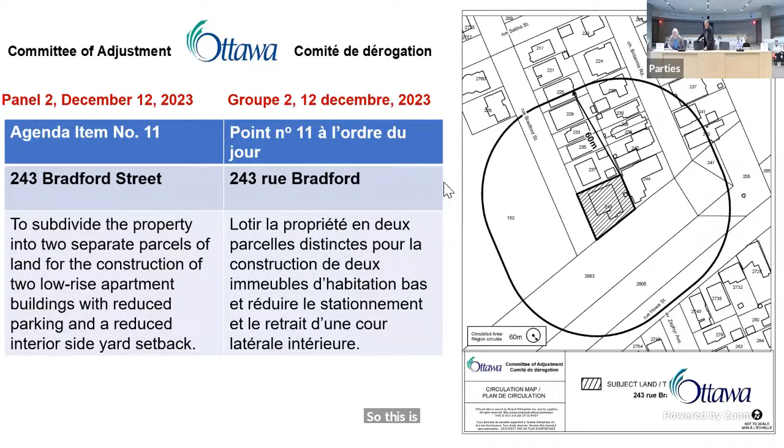At first, the Planning Department has asked for an adjournment on this. Who is here for this one from Planning? Sole Soyak, Planning Department. Thank you. The Planning Department requested an adjournment, given that the application has changed significantly. The adjournment is to provide enough time for the application to be processed and circulated. New notices need to be rewritten and stated, as there are no longer parking variances, and the building is no longer requiring consent as well.

Thank you, Mr. Jokatsi. I understand you're opposing the request for adjournment. Yes, Mr. Chair, we're opposing the request for adjournment. Krista Lidman will address the concerns.

Good afternoon, Mr. Chair. The application before you today has been amended, but simplified significantly from what was circulated. Previously we were seeking consent to sever, to divide the property into two and build two 10-unit apartment buildings, with 5 minor variances. What we're here for today is 1 minor variance and no consents to sever.

The minor variance is as was circulated. It's the same side yard setback that is sought. So for that reason, we don't believe a recirculation is required.

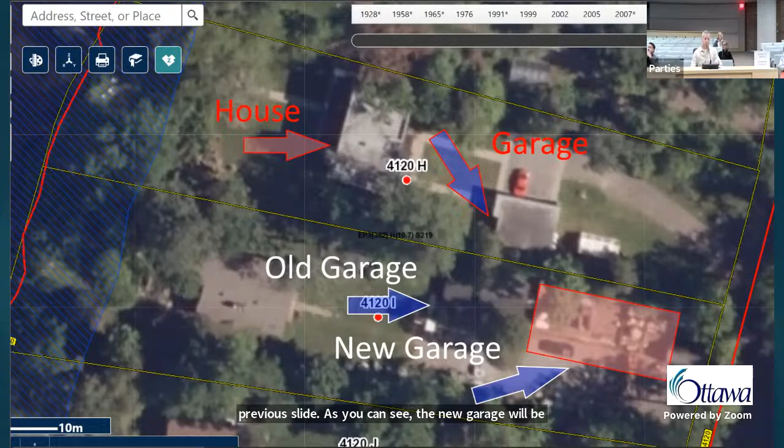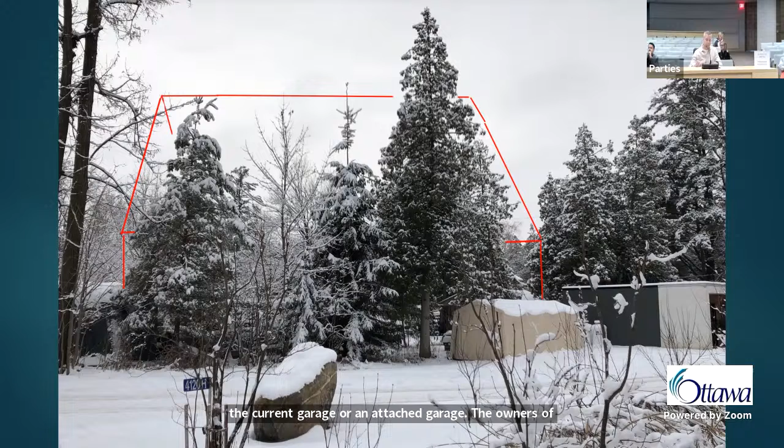This is a photo of the rear of lot H facing towards I. Outlined in red is the approximate location and height of the proposed garage. As seen, several trees will soften the exposure of the garage to H—I planted some of these trees many years ago, including white pine, maple, and Norway spruce. By placing the garage to the rear of the lot, further away from the existing garage, this will have a lesser impact on the owners of H than the current garage or an attached garage. The owners of H currently use this area to store a boat, which you can see is that temporary storage structure.

Limiting the size of detached garages to 55 square meters seems arbitrary, likely derived from suburban subdivisions. Only 1 of 6 existing detached garages meets that size; all others are considerably larger. The 55 square meter limit was not enforced in 2011 for the garage at H. Viewed in the context of the existing garage, the gross floor area increase is minor.

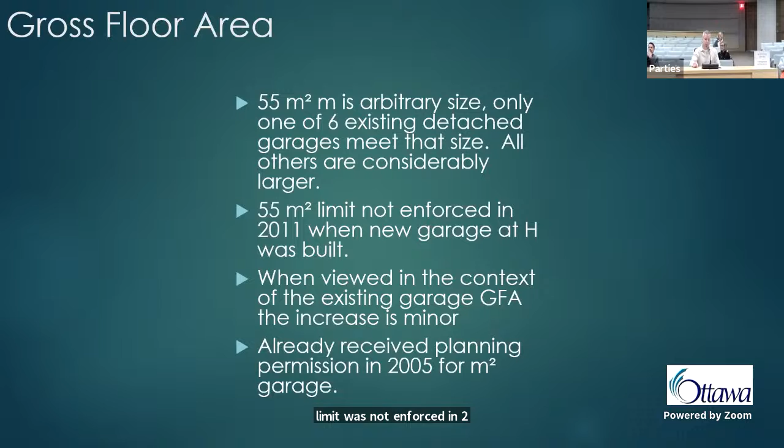This is a plan view to scale showing the existing garage footprint moved so that it is within the proposed garage footprint. As you can see, it is not much larger, but offers much better opportunity to utilize the space. A modern SUV will actually fit in the garage with room to perform maintenance on it, versus the typical space of the 55 square meter garage.

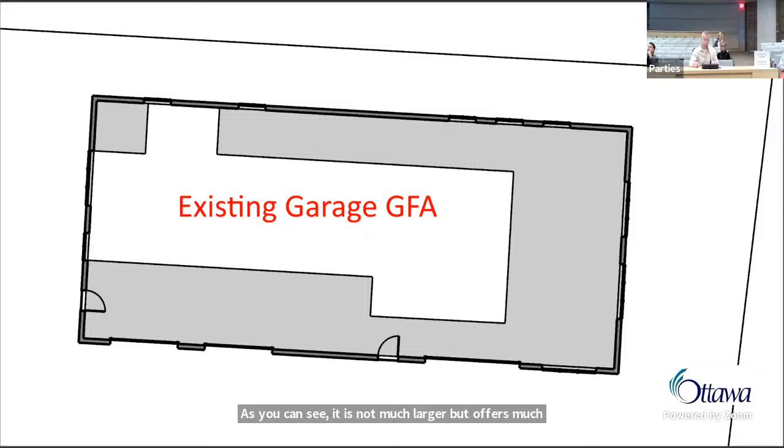The alternative the city recommends is an attached garage. Section 54 defines gross floor area to not include garage space, so an attached garage is only limited by the lot coverage restriction, which is 20% in this case. The lot size is just under 3,000 square meters, allowing just under 600 square meters of coverage. The existing lot coverage is 4.9% without the garage. This would allow a larger attached garage than the proposed detached garage without requiring a minor variance. There would be no chance for the community to comment on the design, as the design would meet all current zoning. An attached garage seems like a loophole that rewards bad architecture. The attached garage would block the view from H, result in removal of trees, and be built to the minimum setback of 1.5 meters.

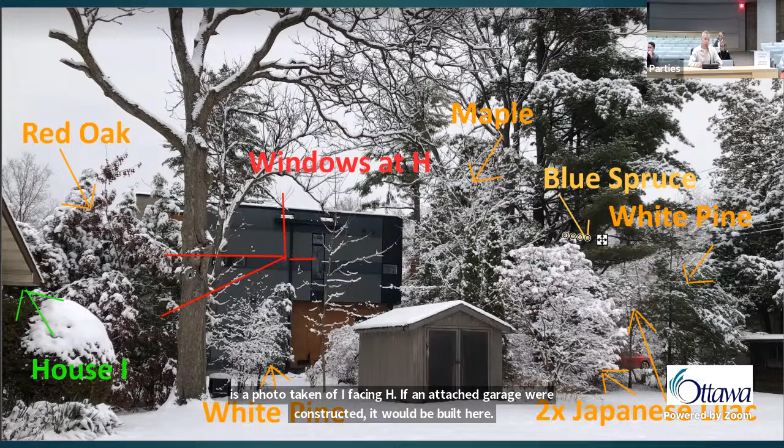This is a photo taken of I facing H. If an attached garage were constructed, it would be built here. The view from H would go from trees and open space to a wall. I planted these trees; they would all be removed to make room for the attached garage. This seems like a major change to the lot versus the proposed detached garage.

This is the existing garage. I'd argue it is already the dominant structure, not only because of the size, but on account of it being an eyesore. I do not have any fancy 3D renders of the new garage to woo you with. I will only say that I plan to build a nice looking building using premium materials. Given that the community believes the proposed garage is minor, I hope that the committee does too.

As mentioned in the documents submitted with the minor variance, I plan to park and maintain a tractor used to maintain the private road of 4120 Riverside Drive. I'd like to be able to work on it without having to lay in the snow. All of us who live at 4120 Riverside Drive feel very lucky to live here; it is a very unique place. Approving the minor variance would not set a precedent because there are no other places like it in Ottawa.

I'll close with a photo and short video from last week of a typical snow day and what it's like living at 4120 Riverside Drive. Thanks for your time.

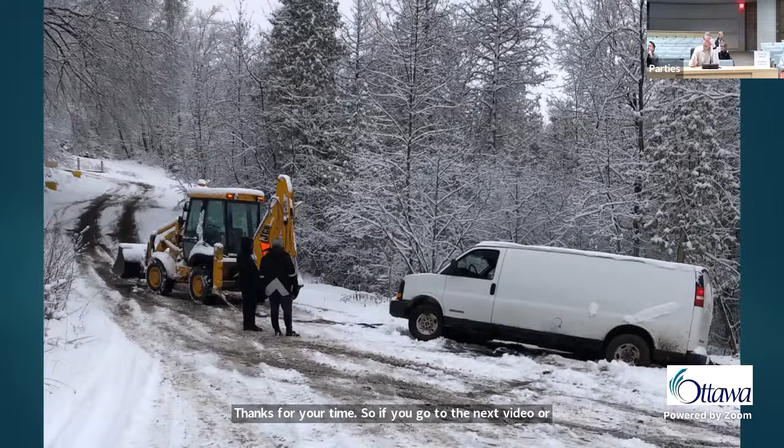This is a private road that serves all our houses at 4120 Riverside Drive, and this is a typical snow day. This is a stuck vehicle, and that's the tractor I want to park in the garage if I can actually build it. It's just a video of me pulling the stuck vehicle out with my tractor and up the hill. Thank you for the time.

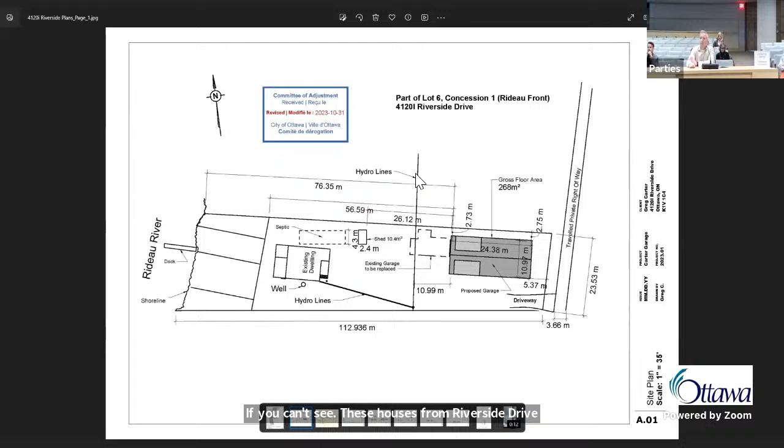Ms. McLean, any comments or questions? I don't think so, I have a question for the planning department, but perhaps one - struggling with the intent of the zoning bylaw, which is one of the four tests. We're dealing with an accessory building that should be accessory to the main use. Can you just expand a bit on why you need such a large garage?

Well, for parking, and then for my hobbies. And part of it is so I can park that tractor in there as well, and that tractor is used to maintain the private road that we all live on. And I mean, it's more space - I don't word it correctly. Well, for my hobbies and for the parking, and the reason I chose the eave height was so that I could actually get the tractor inside.

Sorry, you have a dormer? Is that a dormer on the roof, or? The dormer was put to use as skylights. So you're gonna have a workshop, park your vehicles? Yes. And then park the tractor? Yes. Okay, thank you. And for hobbies specifically, like not for commercial use.

Okay, Mr. Barrett, do you have any questions for the applicant? Not at this time, thank you very much. Ms. Wright, you have any questions? Do you have a business that you run out of that garage? No. Do you run a business out of your home? No, I'm a software developer. Okay, thanks. All right, so now I'd like to move on to...

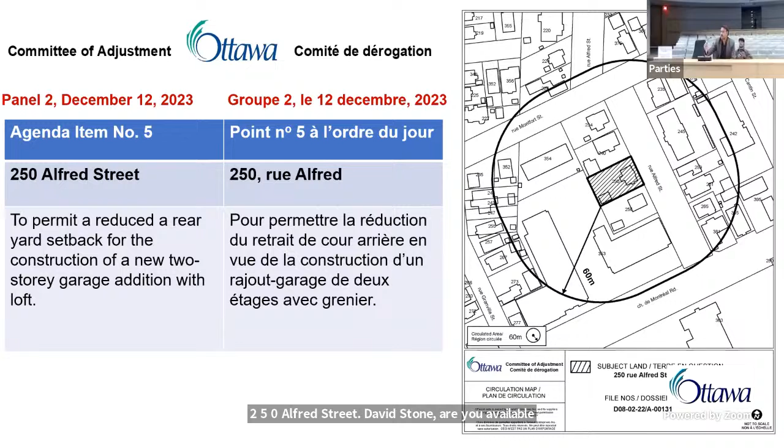Thank you, Mr. Chair. Would you please state your name and address? Sure, I'm David Stone at 42 Hindenburg Place, and I'm a licensed architect practicing in the city. Great, could you give us a brief description of your application today? Sure, absolutely, I do have a presentation. Would you like me to go through that? Absolutely, yeah, you have 5 minutes, sir. Okay, thank you.

Could I get the next slide, please. So the subject property is a single family residence in the Vanier Ward 12 neighborhood. There's a site context plan; we're located just north of Montreal Road. This image is showing the immediate context, which is a large quantity of multi-unit housing, high-rise apartment buildings, and a large quantity of commercial retail plaza space and open-air asphalt parking. The property is circled in red.

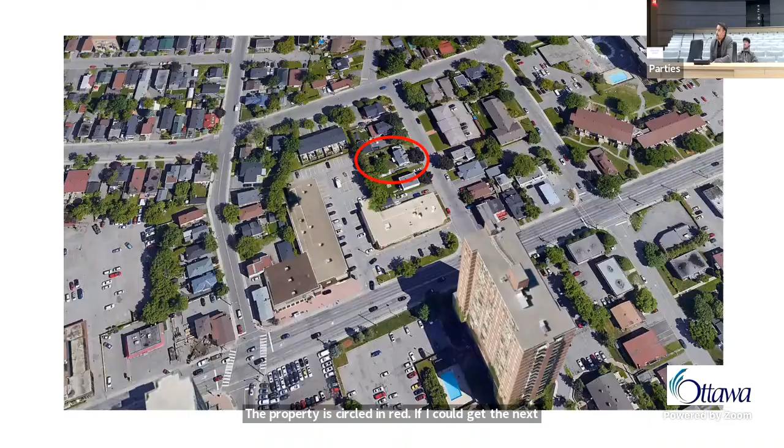If I could get the next slide, please. Just to zoom in on the immediate block, you can see the subject property in the middle. There's only a small number of single family residences in the neighborhood, and the majority of those do have, for context, large outbuildings or rear additions that are built directly on the rear property line.

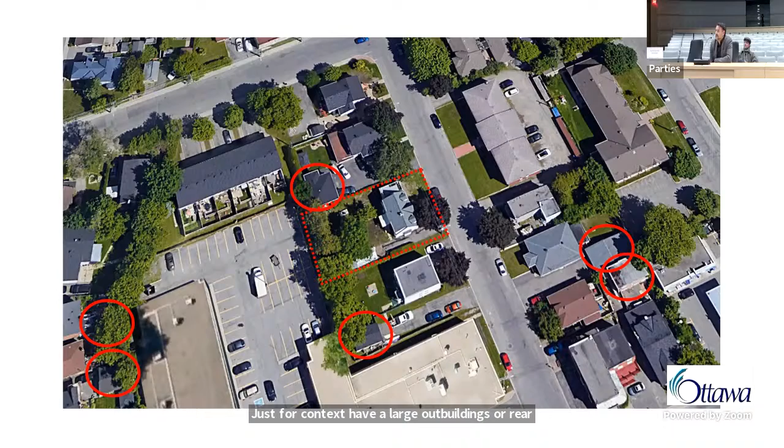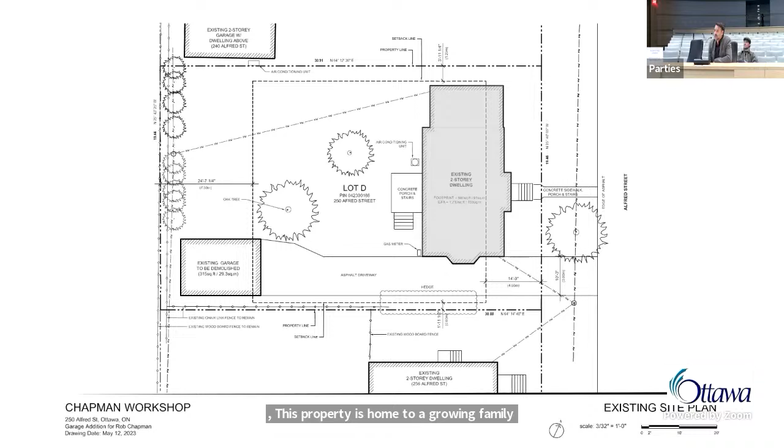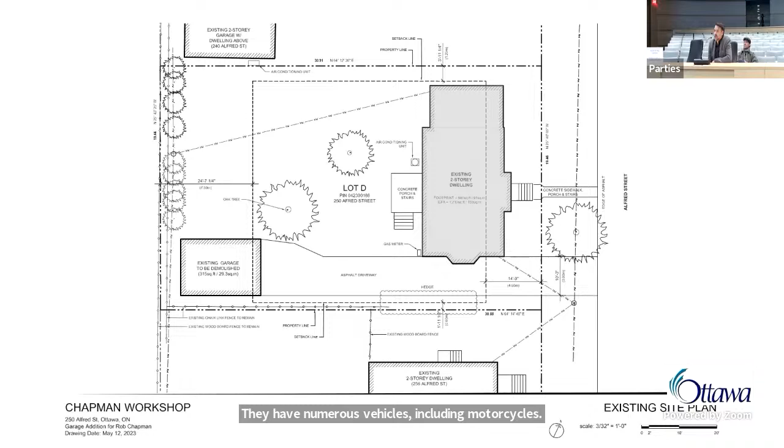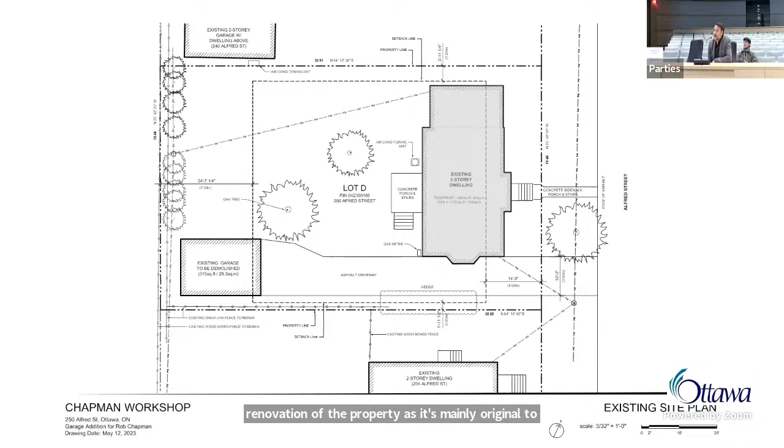So this is a site plan. To describe the proposal, this property is home to a growing family. They have an original 1940s single family residence; it's quite compact, and they're in need of additional storage and parking. They have numerous vehicles, including motorcycles, and the homeowner is a collector and has a requirement for a lot more storage space than he currently has. Also, the family plans to undertake a large interior renovation of the property, as it's mainly original to the 1940s, and this addition proposal would also assist with storage of materials and tools needed to undertake that renovation.

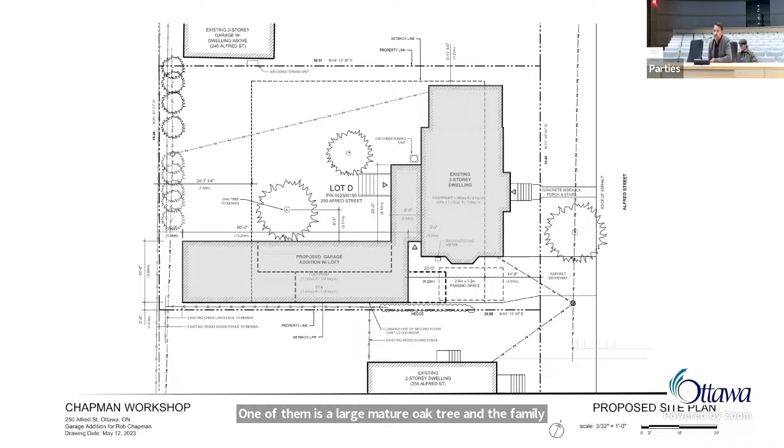If I could get the next slide, please. So you can see here the property is 30 meters deep, and the rear yard setback requirement is 25% of the lot depth, which results in 7.5 meters. But when we looked at that, you can see there's two large trees in the middle of the rear yard, one of them a large mature oak tree. The family really wanted to maintain these oak trees and maintain as much green space and functional backyard space as part of their plans to expand.

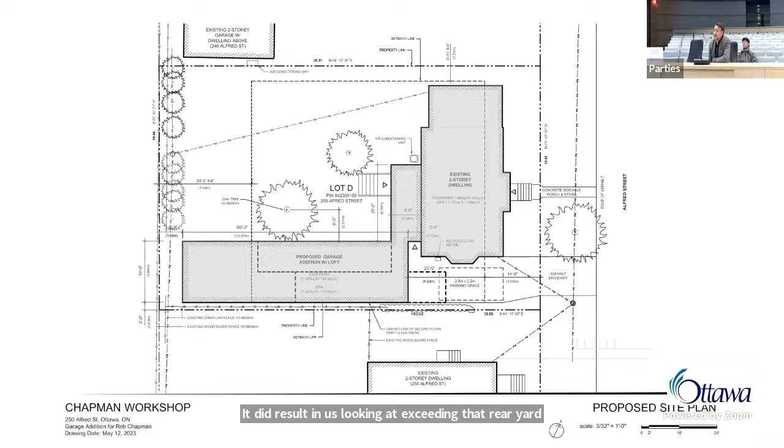This led us to a more compact, long linear addition as opposed to a larger addition right off the back of the property, in order to maintain those two trees and as much green space for the family as possible. So with the storage requirements for the number of vehicles they have, it did result in us exceeding that rear yard setback from 7.5 meters to 1.88 meters, or from 25% of the lot depth to 6.1% of the lot depth in total.

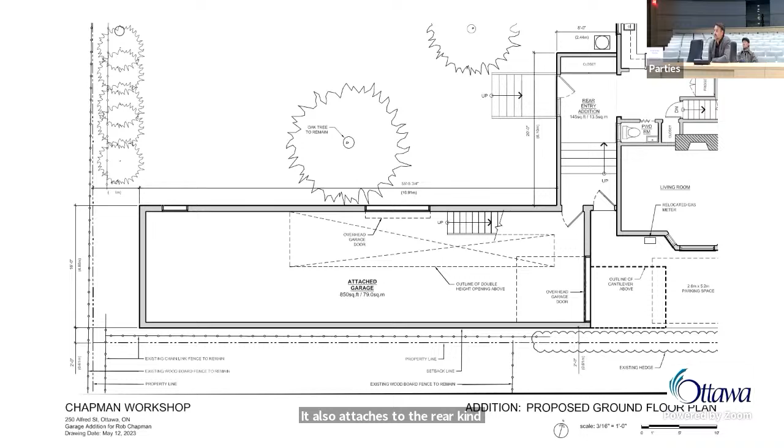It's the ground floor plan of the rear garage, which would have some openings to the backyard. It also attaches to the rear mudroom and kitchen of the house. And it would include a loft space for storage that's open to below, as well as a terrace connection to the upper floor of the single family residence.

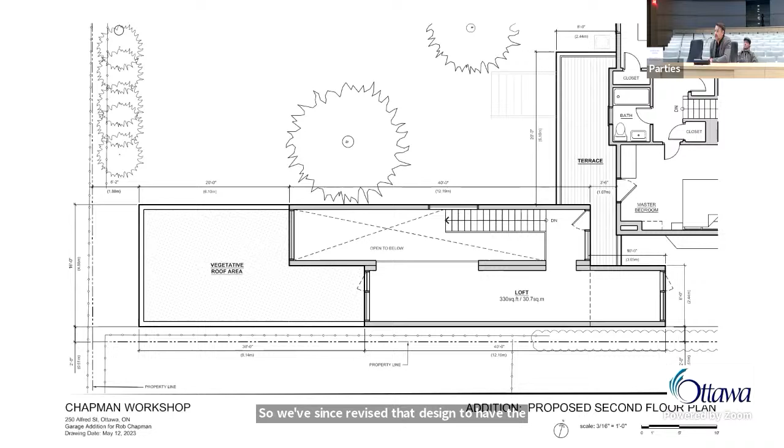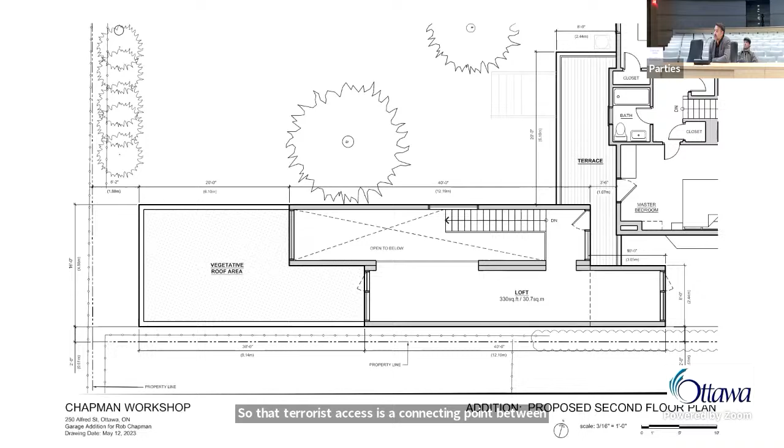Originally, our design had that terrace at the rear of the addition, but planning staff had concerns about privacy for the adjacent neighbors. So we've since revised the design to have the terrace more introspective to the backyard, more private and secluded, so as not to disturb the neighbors. That terrace acts as a connecting point between the second floor of the addition and the second floor of the residence.

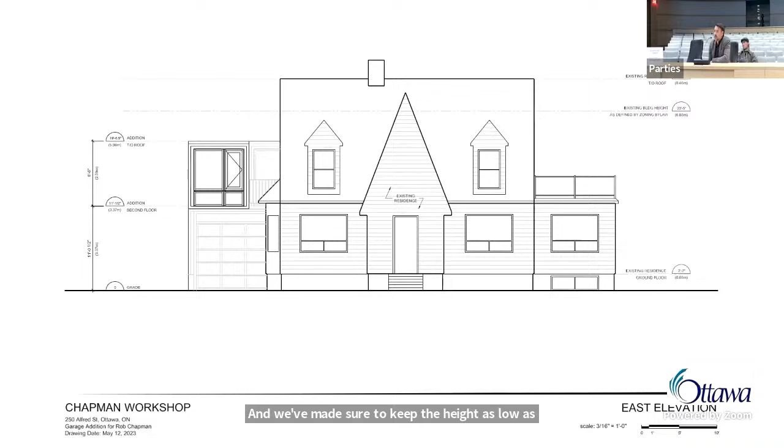This is a front elevation of the existing house, showing the compact nature of the garage addition on the side to the south. We've made sure to keep the height as low as possible with that loft space in order to meet the height requirements.

The homeowner is a metal fabricator by trade and does plan to undertake the construction of this project himself. So we're going to be utilizing shipping containers to that effect, but trying to make them as aesthetically pleasing as possible, so they don't appear as an industrial structure in the neighborhood. That being said, the form is really in keeping with a lot of the boxy forms of the neighborhood.

Interestingly, there's a new precedent in the neighborhood, the Vanier Hub community space, which also utilized shipping containers as part of a public art project.

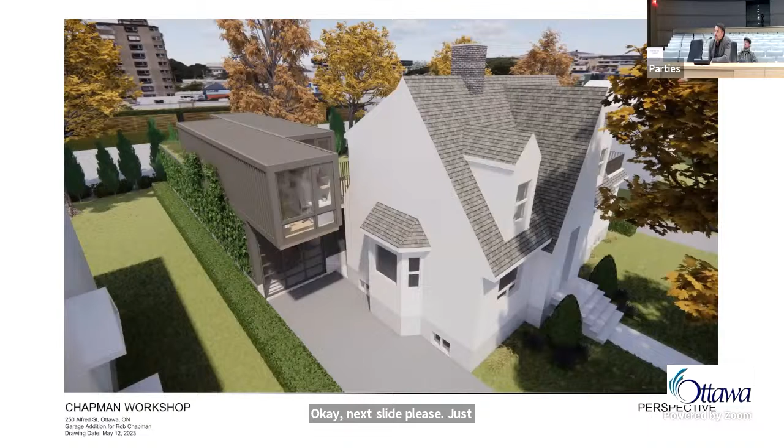Just a few quick rendered views to give you a sense of the proposal. This is looking from the south, the proposal slipping past the side of the single family residence.

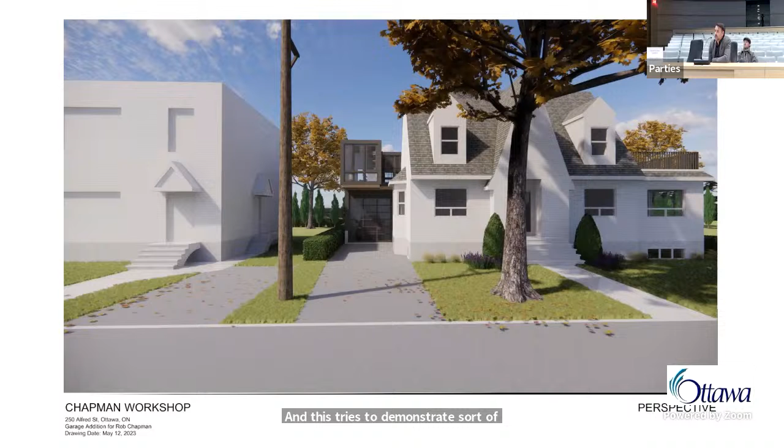We did our best effort to step the massing away from the open spaces of the adjoining properties and neighbors, so the second floor of the addition steps away from the rear and south facing adjacent properties. We're also keen to utilize planting screens, vine screens, and green roofs on the addition to minimize the visual impact to the neighbors, as well as to provide a habitat for animals in the neighborhood.

That's really the end of my proposal.

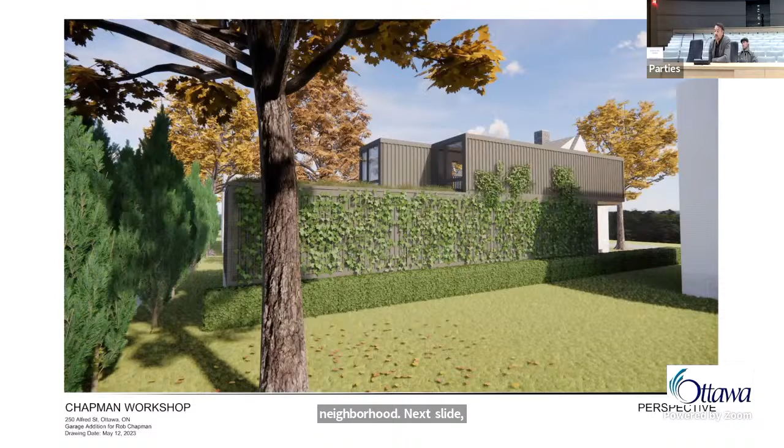Question: you're going to incorporate shipping containers to build this structure, is that correct? There's actually 6 in total. The lower level is constructed of 4, but they're varying sizes. So the 40 to 50 foot range? The lower level is constructed of 2 30-foot containers and 2 20-foot containers, and the upper floor is 2 30-foot containers.

Is there a need for a foundation of some sort, either a concrete slab, for the containers to sit on? Yes, that's correct. We're going to do a slab on grade. We haven't completed the engineering exercise yet, but we'll likely be utilizing a thickened perimeter slab foundation to avoid any deep excavation needed for traditional footings. That's most likely achievable given that the shipping containers are relatively lightweight relative to traditional structure.

And another question with regards to the Chapman workhouse, or workshop, which is the term used in the presentation.